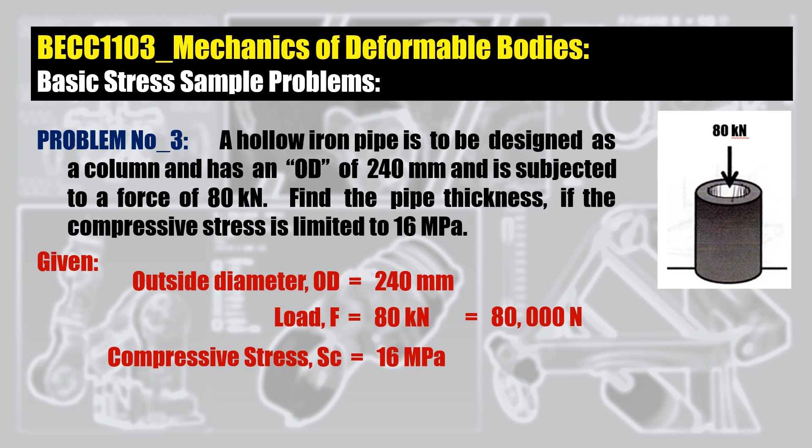So once again, list down natin mga given conditions. So given, 1, yung outside diameter niya, DO, is equivalent to 240 millimeters. Then yung load o external force natin is equivalent to 80 kilonewton. So 80 kilonewton is also equivalent to 80,000 newtons. And then yung compressive stress natin, SC, is equivalent to 16 megapascal or which is also equivalent to 16 newton

per square millimeter. So ang basic formula na gagamitin natin dito is you have S is equivalent to F all over A, or SC is equivalent to FC all over A. So since na-mention dito na yung tinutukoy nating figure is a hollow cylinder, gagamitan natin siya ng formula ng area ng isang hollow circle o hollow cylinder.

So in this case, lalabas, you have FC. So yung area natin, area ng isang hollow circle o hollow cylinder, you have pi all over 4, DO square minus DI square. So in this case, transpose na natin yung value ng DO square, DI square, pi all over 4. So pagpalitin natin ng pwesto itong part na to compare dito sa part ng SC. So in this case, you have DO square minus DI square is equivalent to FC all over SC.

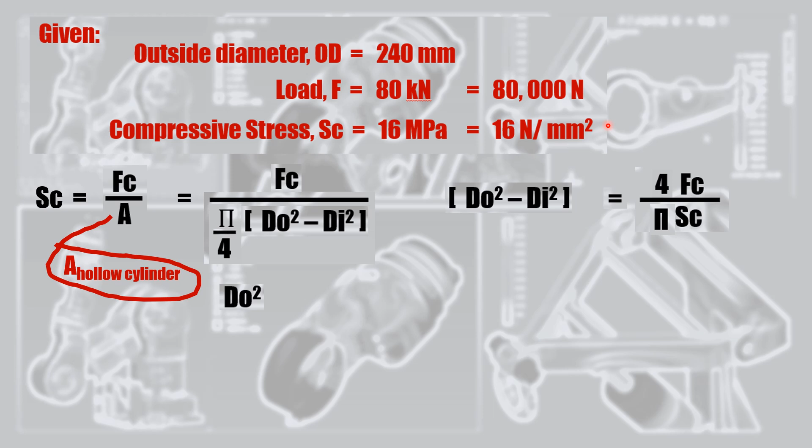So notice na meron tayong pi all over 4. So in this case, si pi pwede nating iwanan sa ilalim and then si 4 pwede na natin siyang itaas. So you have DO square minus DI square is equivalent to 4FC all over pi SC. So in this case, you have DO square is equivalent to 4FC all over pi SC. Kung papansinin nyo, itatranspose natin o ililipat natin yung DI square na negative doon sa right side. So from being negative, eventually magiging positive. So you have positive DI square.

Now, since ang goal natin dito is kuhanin natin yung inside diameter, igagalaw natin yung portion ng 4FC all over pi SC. So initially, positive siya. So pag nilipat natin siya doon sa may left side, eventually magiging negative siya. So eventually, ang equation natin then becomes DO square minus 4FC all over pi SC is equivalent to DI square.

So, lagyan na natin mga corresponding values. So, yung outside diameter natin is you have 240 millimeters squared minus you have 4. Then, yung load natin, compressive force natin, is you have 80,000 newtons. Then, consider natin yung pi. Then, yung corresponding value ng compressive stress, SC, which is equivalent to 16 newton per square millimeter. So, in this case, magka-cancel out yung newton. So, unit ng square millimeter minus a unit of square millimeter, eventually, ang unit niya is square millimeter. So, ang unit natin ng DI square is square millimeter.

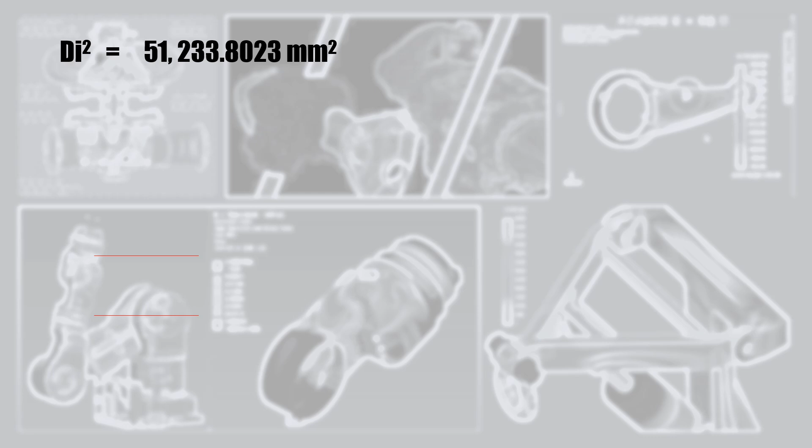So, DI square is equivalent to 51,233.8023 square millimeter. And then eventually, pag sinimplify pa natin further, DI is equivalent to square root ng 51,233.8023 square millimeter. So eventually, ang magiging corresponding value natin dito na inside diameter, you have 226.3489 millimeter. Now, para makuha natin yung tinutukoy natin na pipe wall thickness, tingnan natin yung itsura o yung configuration ng

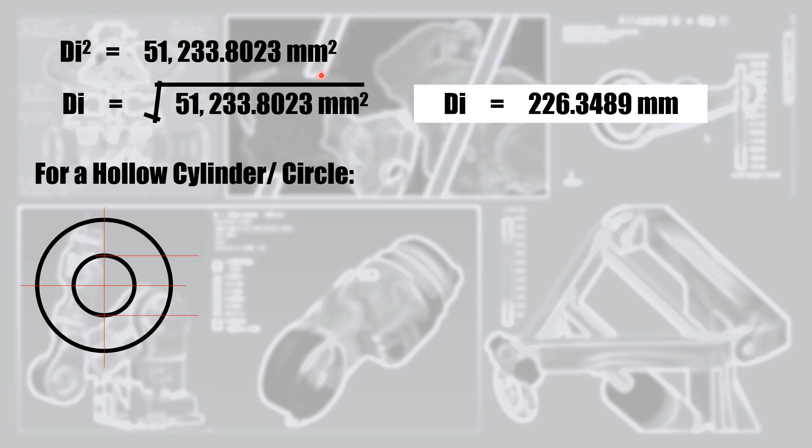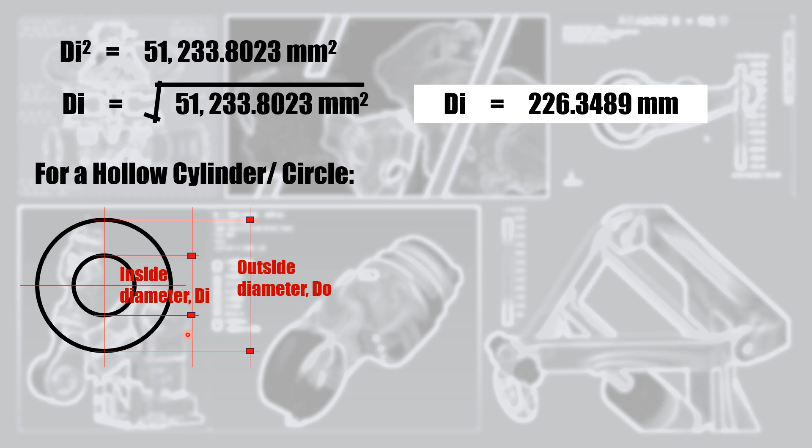isang hollow cylinder or hollow circle, which is basically ito. So, pag tinignan natin siya, meron tayong mga corresponding measurements na makikita as well as dimensioning. So, yung pinaka-outermost diameter, ang tawag natin dito is the outside diameter or DO. Then, yung innermost diameter is yung tinutukoy natin na inside diameter, labeled as DI. And then, at both sides, mapapansin natin, meron tayong corresponding pipe wall thickness. So, thickness T. So, kung pagbabasehan natin yung configuration, yung outside diameter natin is DI plus twice the value of the thickness, or plus T plus T. So, DO is equivalent to DI plus 2T.

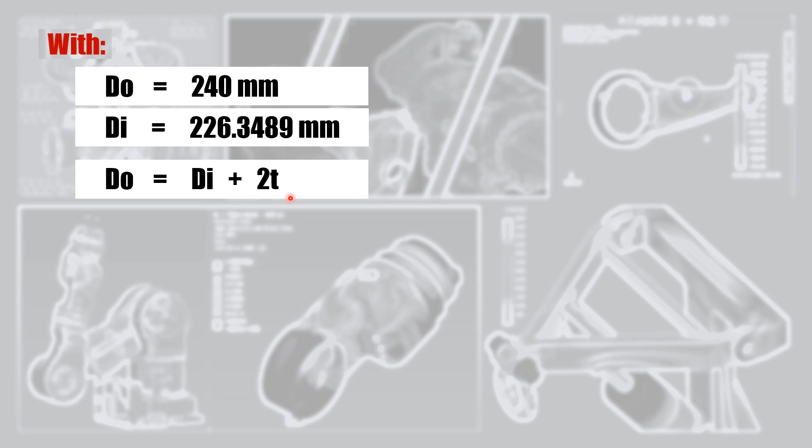Now, dito, given yung outside diameter at 240 millimeters, then kakukuha lang natin ng value ng inside diameter, which is at a value of 226.3489. And then, base doon sa corresponding configuration ng isang hollow circle, yung outside diameter niya is equivalent to the value of the inside diameter plus twice the value of its pipe wall thickness. So yung thickness T natin, therefore, is equivalent to DO minus DI all over 2. So, try na natin i-solve yung value ng pipe wall thickness.

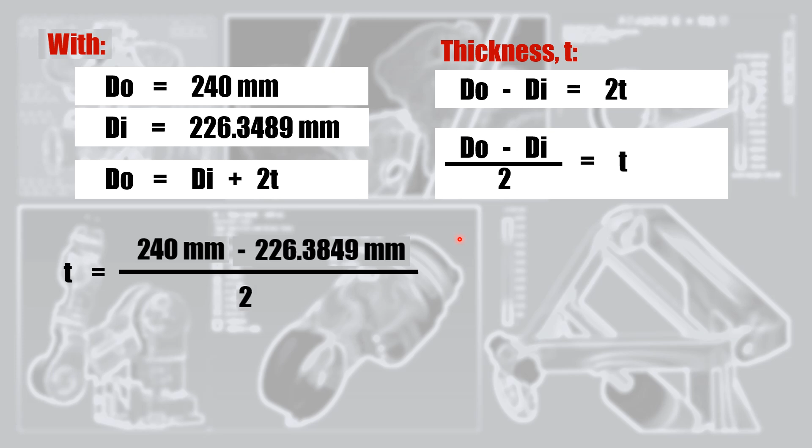So, T therefore is equivalent to DO. So, yung DO natin is 240 millimeters less yung value ng DI, which is 226.3489, all over 2. So, kung sisimplify na natin yung buong equation, ang pipe wall thickness natin for this particular problem configuration is at a value of 6.8256. So, yun po yung nahanap natin na pipe wall thickness.